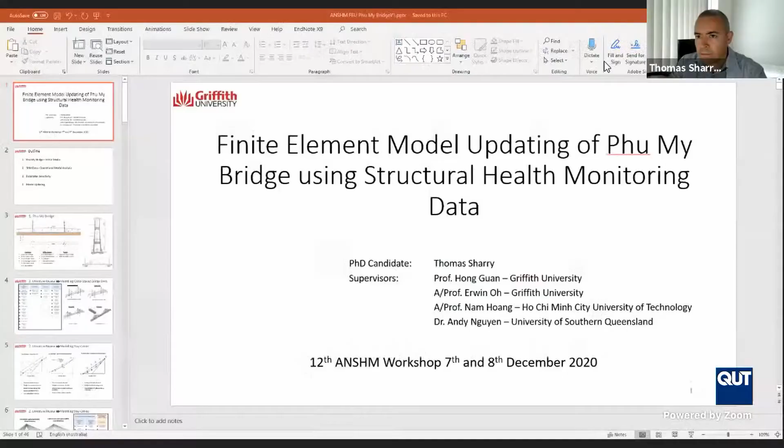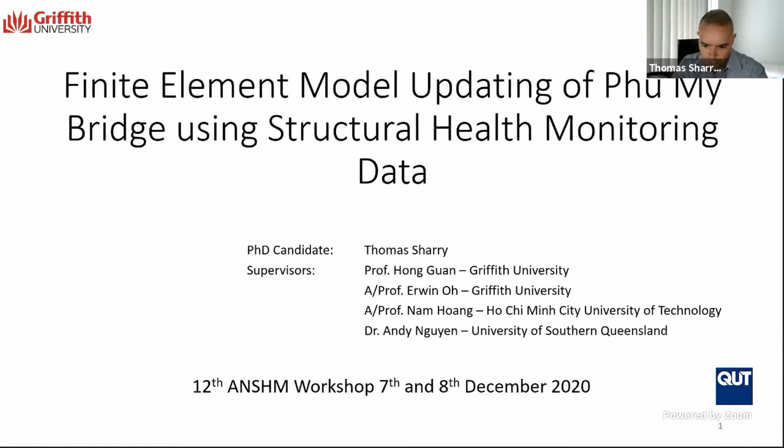Good morning everyone, or good afternoon, and thank you to Professor Guan and the organisers for this opportunity to present some of the work I've been doing as part of my PhD candidature at Griffith University. I'll acknowledge our research team: my supervisors Professor Guan and Associate Professor Erwin Oh from Griffith University, Associate Professor Nam Hoang from Ho Chi Minh City University of Technology, and Dr. Andy Nguyen from the University of Southern Queensland.

I'll be presenting the progress so far regarding the finite element modelling and model updating of the Phu My cable-stayed bridge in Vietnam: an overview of the bridge, details of how the initial model was developed with some initial results, then results from the ANSHM data through operational modal analysis, parameter sensitivity, and the model updating procedure that will be used.

The Phu My Bridge is a cable-stayed bridge in Vietnam over the Saigon River in Ho Chi Minh City, connecting District 7 on the southwestern side to District 2 on the northeastern side. It's a reinforced concrete bridge with a 380-metre main span. The bridge opened to traffic in September 2009, and the SHM system was installed towards the end of 2019. That system comprises 3 inclinometers on the eastern side pylon, 8 accelerometers (4 on the deck and 4 on the longest cables on the eastern side), 6 cameras, 1 weather station, and 1 anemometer.

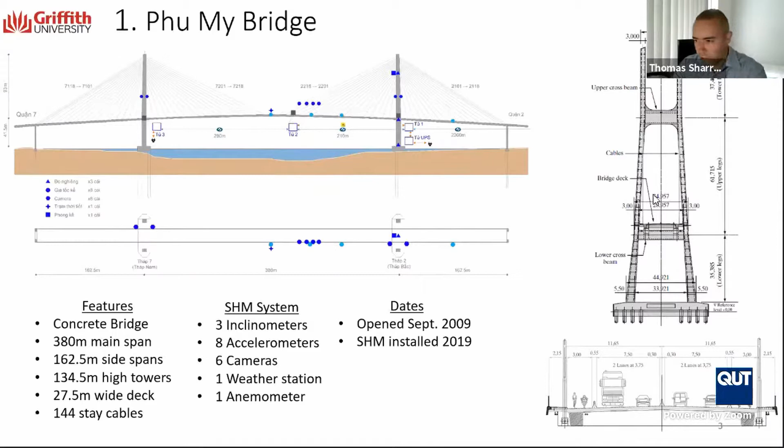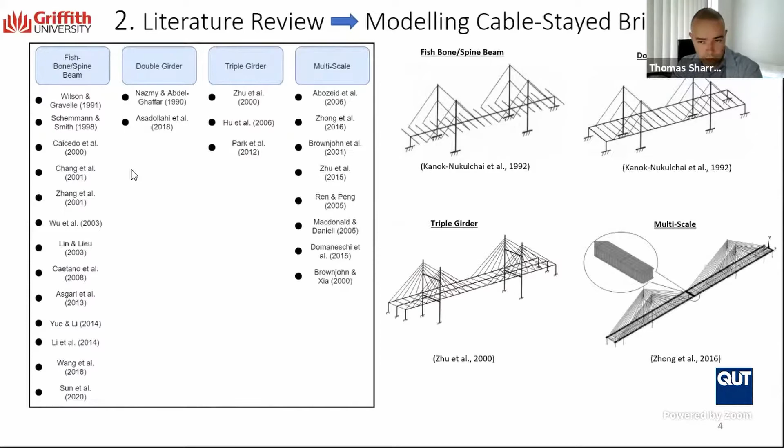The first step was to identify different cable-stayed bridge modelling approaches existing in the literature: a single girder model representing the deck as a line beam element, a double girder model, a triple girder model, and a multi-scale model using a combination of line and shell or solid elements. From the literature, by far the most common was the single girder model, also called the fishbone or spine beam model, mainly due to its simplicity in modelling and accuracy in identifying global properties.

For modelling the stay cables, there are 3 main approaches: the linear model, with a node at the deck level and a node at the pylon connected by a straight line element adopting the cable's modulus of elasticity, ignoring geometric effects; an improvement using an equivalent elastic modulus via the Ernst formula, which approximates the cable profile as a parabola; and a multi-element model with intermediate nodes connected by straight line elements, with weight distributed along these nodes to better approximate the cable's true catenary shape.

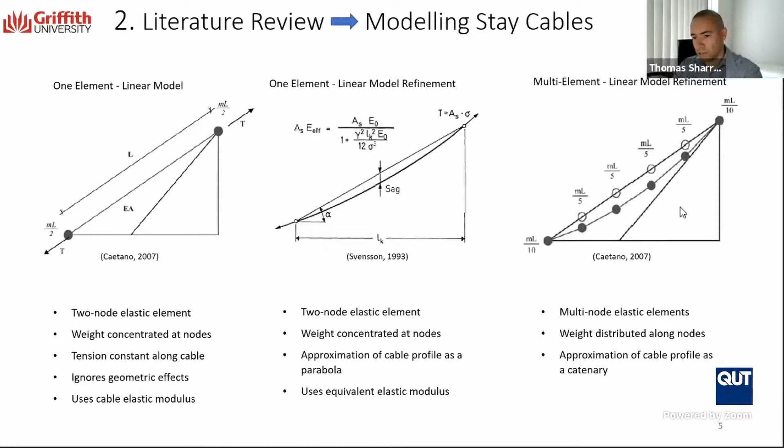An example shows the difference between a one-element cable system and a multi-element cable system: one-element cables result in global behaviour, such as behaviour in the deck and pylons, whereas multi-element cables result in local behaviour, such as individual cable vibrations. A glance at the literature shows the equivalent elastic modulus for the one-element cable system is by far the most popular, though there are also many studies with multi-element cables, mainly investigating the interaction between local and global vibrations.

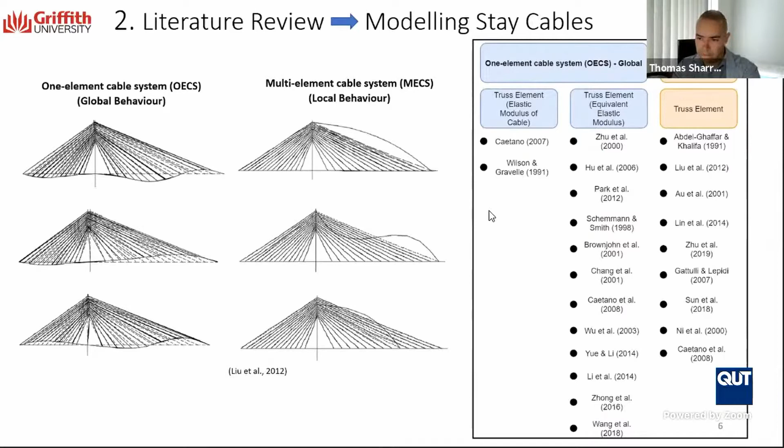The next step was to duplicate an existing model in the literature to identify a valid method for modelling the Phu My bridge. A paper by Li et al. 2014 models a cable-stayed bridge in China used for SHM benchmarking studies. That model is shown on the left, along with the identified natural frequencies for the first 6 vertical modes, using the single girder method and one-element cables. My attempt at duplicating that, using Abaqus, is shown on the right. It's fairly consistent in terms of mode shapes and natural frequencies, though one model was slightly stiffer, causing a small difference in frequencies. Overall it was a worthwhile exercise, both for practice and for identifying a valid approach for modelling Phu My.

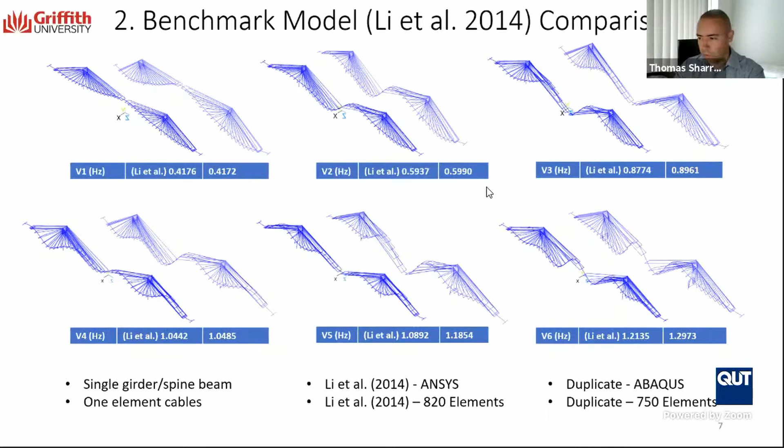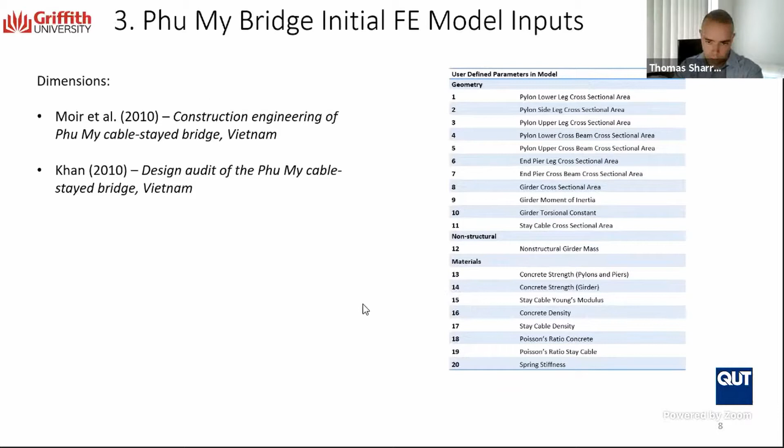So the bridge dimensions are available in 2 publications, and then from the model in Abaqus, 20 parameters needed to be defined related to the geometry of the bridge, the non-structural girder mass, and then material properties like concrete strength, density, etc. So all that needed to be defined, and from there the initial model of the Phu My bridge was created.

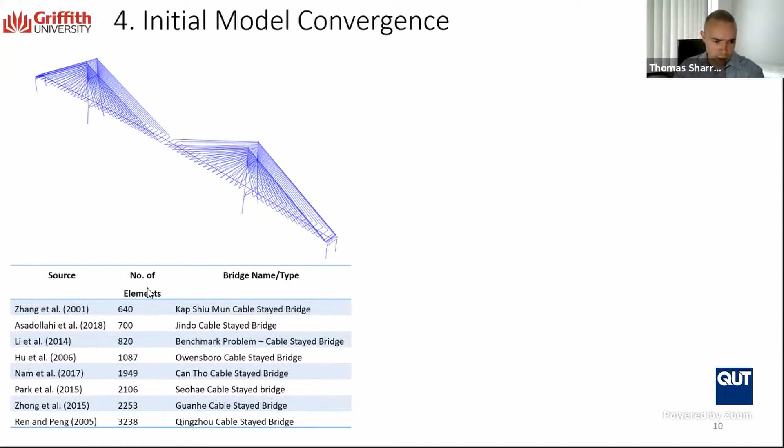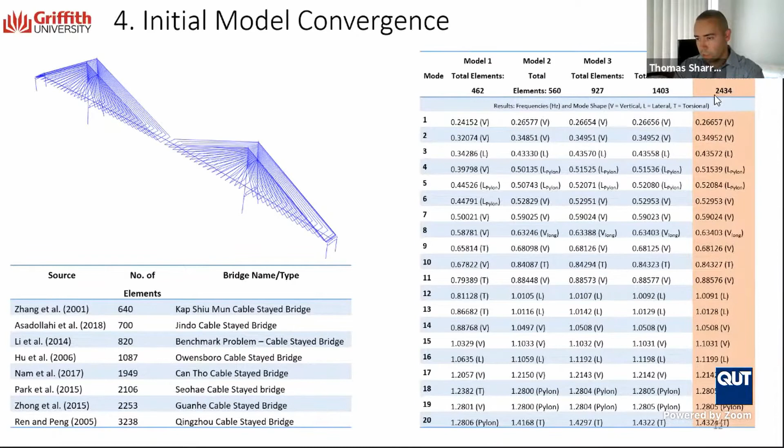Again, a comparison with the literature using similar sized bridges and their FE models. The number of elements range from roughly 600 upwards of 3,000. My initial first model had 462 elements. Those elements were slowly increased until convergence in results was achieved with the model with roughly 2,434 elements. Just an example there of how convergence was achieved in the results for mode 1 as the number of elements increased in the model.

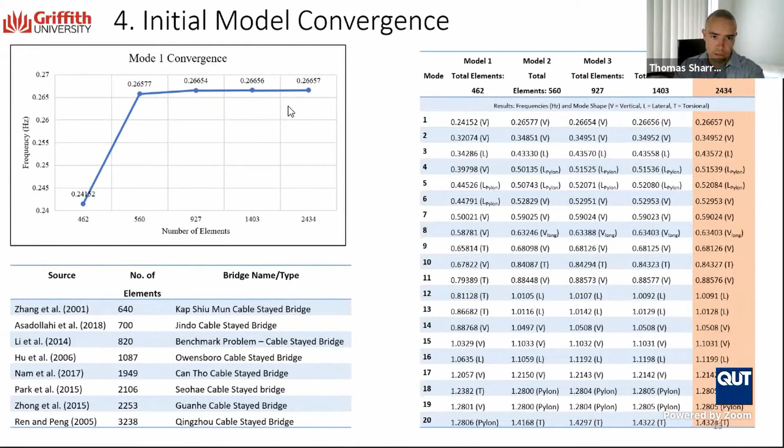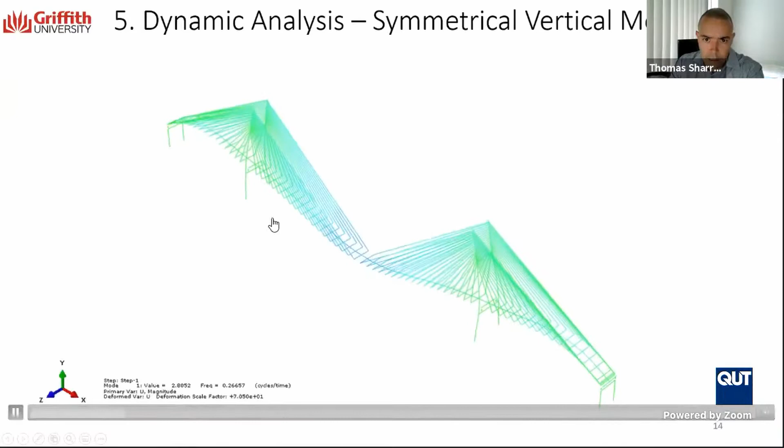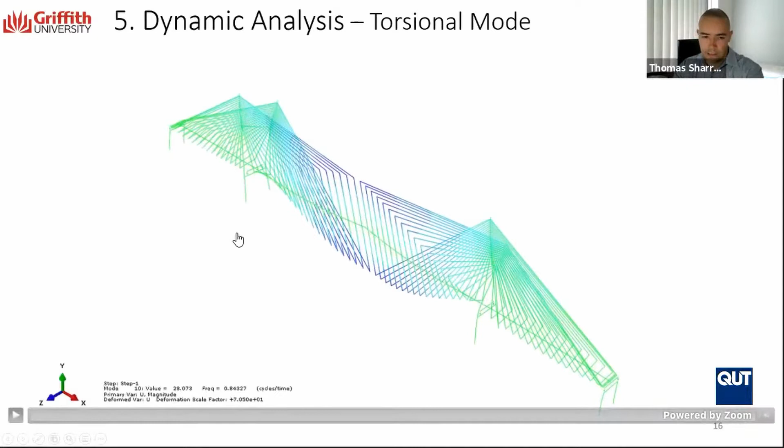Okay, so that was the initial model and its initial results. So moving on to the SHM data.

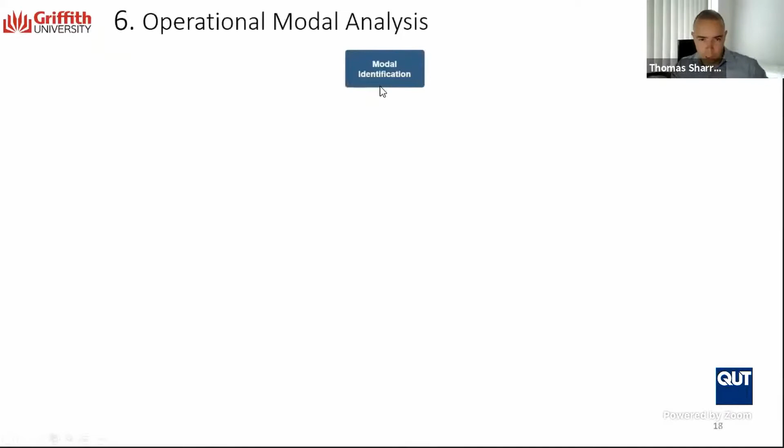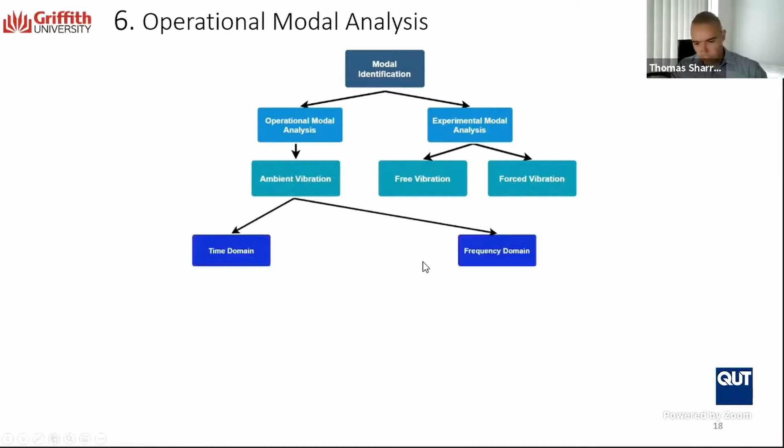Just a very brief overview, with modal identification as the goal here, can be achieved through operational modal analysis or experimental modal analysis with different vibration inputs. So obviously for long-term monitoring, we're interested in ambient vibration, which can be expressed in either the time domain or the frequency domain, examples of those. And then within each domain, a set of methods and sub-methods used to identify the modal properties from that data.

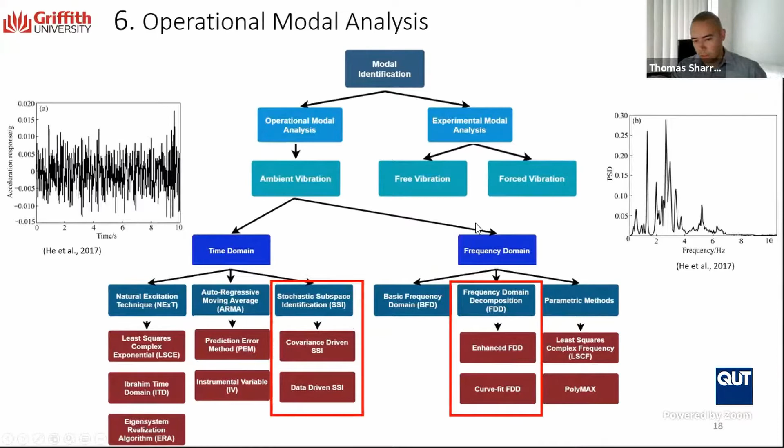So for my project, I'm using a program called Artemis Modal Pro, which allows users to select either the stochastic subspace identification method or the frequency domain decomposition method, depending on which domain they're working in. So this here is a 1 hour time series data, just an example from the Phu My bridge: the mid-span accelerometer in the X and Y direction, and the side-span accelerometer in the X and Y direction as well. The initial data looked at over a 1 week period, which was 168 1-hour sets of data that were analysed.

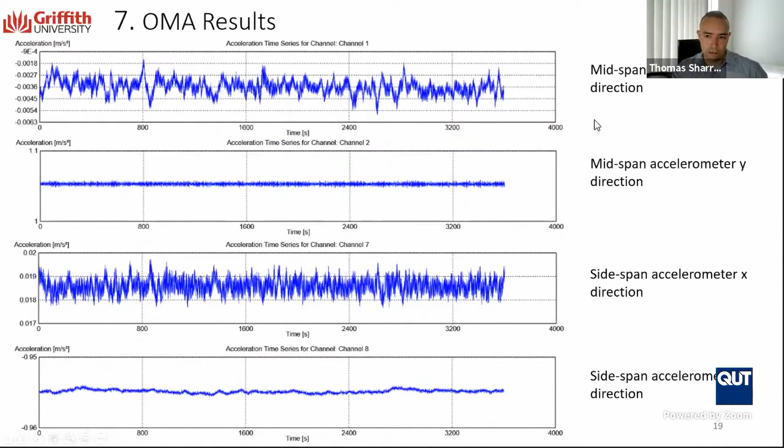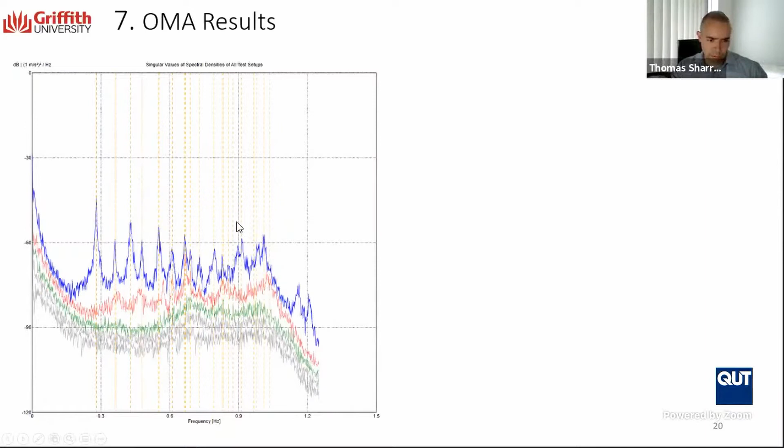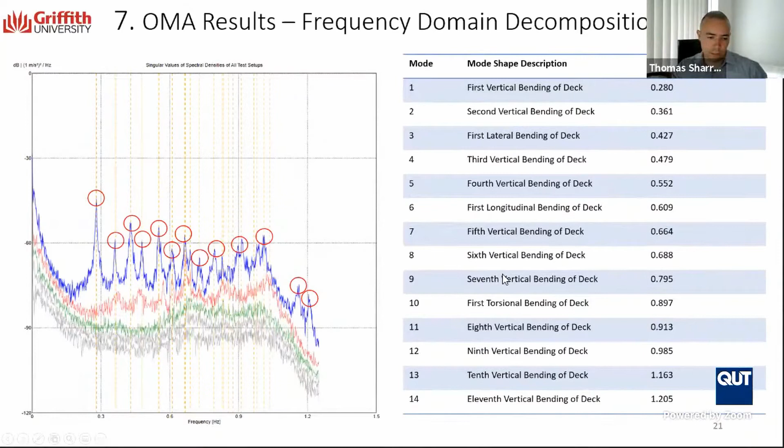Here's an example after converting to the frequency domain, so it's a lot more intuitive. You can see the prominent peaks there. So using the frequency domain decomposition, essentially a peak picking type method, the natural frequencies and the mode shapes were identified from the data of the bridge.

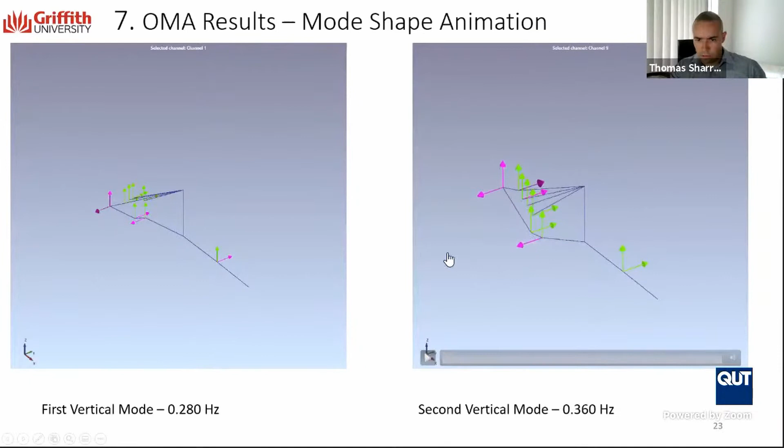So just some mode shape animations from Artemis. You can see the first vertical mode there. On the left-hand side is the mid-span of the bridge, and the right-hand side the side span. Each of these arrows is the location of an accelerometer in the X or Y direction. So the second, asymmetrical vertical mode, a lateral mode, and just an example of a higher lateral sway mode. That data was from the end of July and early August.

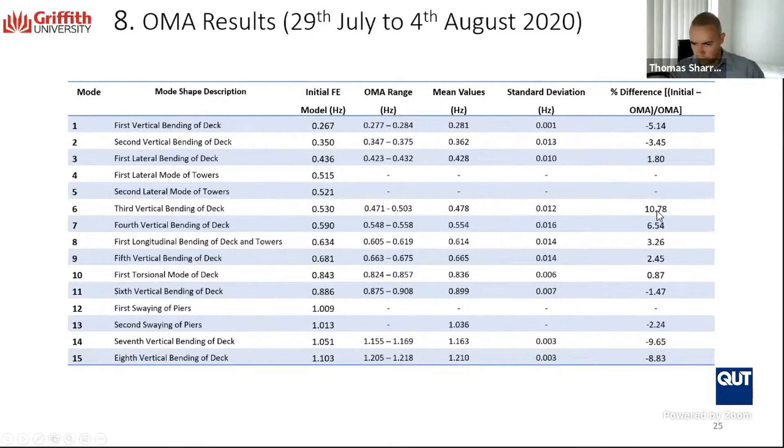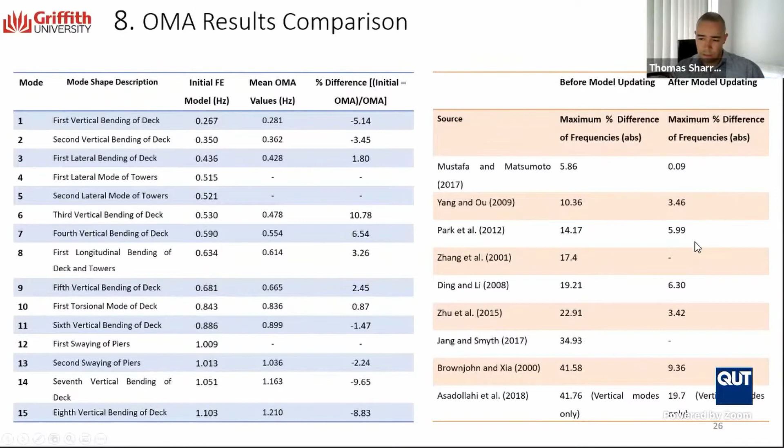So comparing that to what's in the literature, you can see before model updating, minimum or maximum absolute differences range from roughly 6% and 41%. So for my results, having a maximum value of 10% puts me down at the lower end of this range, which is a good start. And then after model updating, I'd expect a maximum difference of ideally less than 6 or 5%, which would be a good achievement.

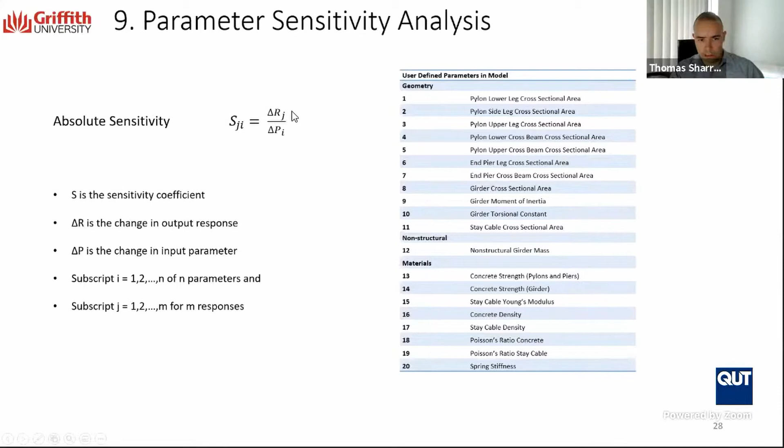So moving on to parameter sensitivity. The absolute sensitivity was calculated for each of the input parameters in Abaqus, simply by the change in response divided by the change in parameter value. It's just a very sort of bird's eye view of the different sensitivities. Cable cross-sectional area is by far the most sensitive, so I've had to separate it from the rest. You can see the next sensitive would be the girder cross-sectional area, and you can see how it changes sensitivity for each mode, 1 to 15.

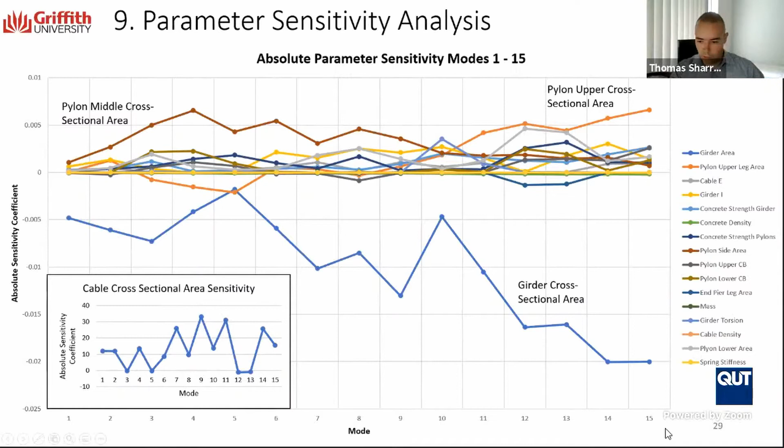So another way to look at that data is to break it up by mode, and we can see how sensitive individual parameters are for each mode. For the early modes, for example, the pylon side area is quite prominent. And then in the higher modes, the pylon upper leg area comes into play as well.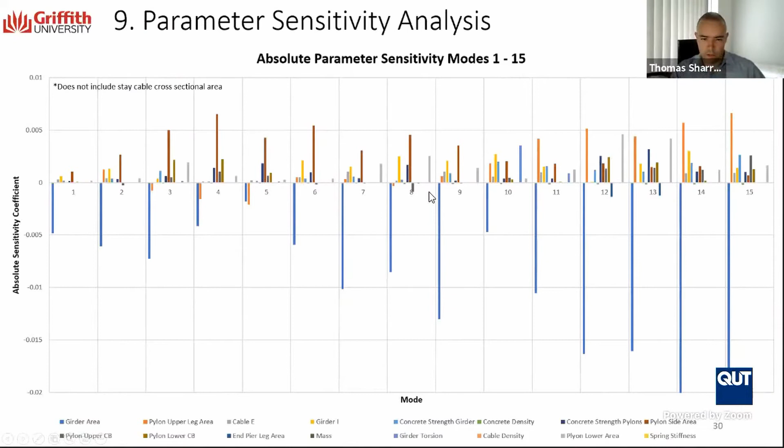So it just gives you a better feel for how the model responds to different changes in parameters. The parameters were then rearranged from most sensitive to least sensitive, stay cable cross-sectional area being the most sensitive, followed by the girder cross-sectional area and pylon dimensions. Things like Poisson's ratio and the end pier dimensions had very little or no sensitivity.

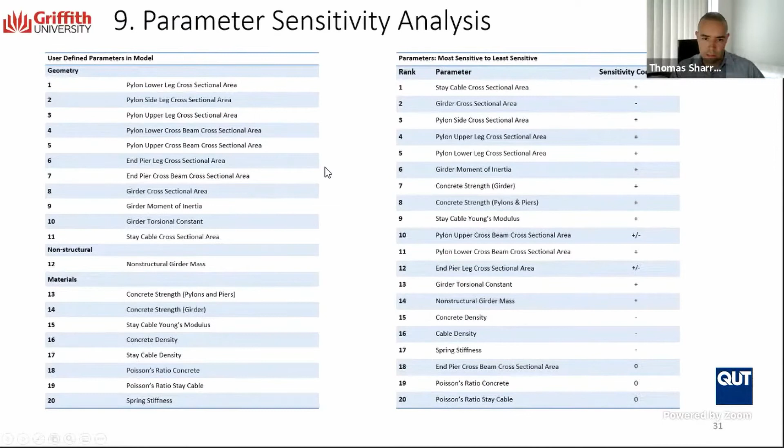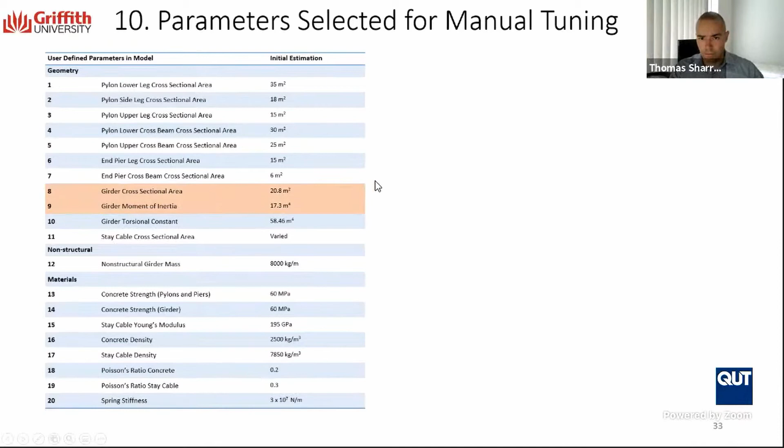Manual tuning was attempted just to see if that initial model could be improved. The two most uncertain parameters were the girder cross-sectional area and the moment of inertia, so those were slowly increased over a number of iterations.

The red here indicates a mode getting worse, whereas the green shows improvement. By the third iteration, there was small improvement across most of the modes, but you can see mode 1 and 2 are worsening.

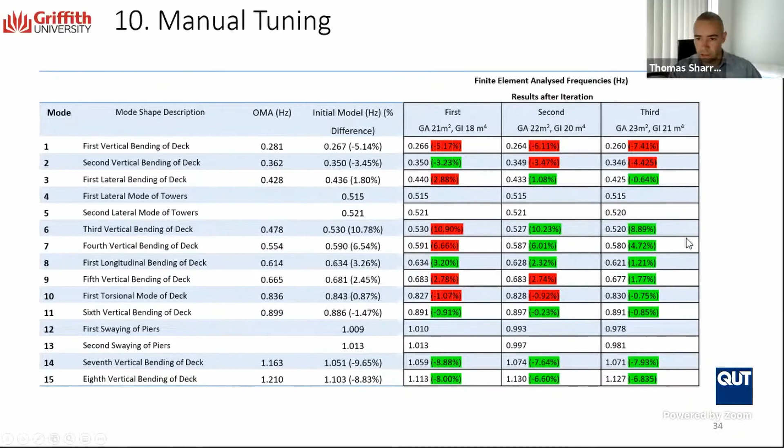This mode 6 here was quite problematic, because as you can see, any attempt to improve this mode actually makes mode 1 and 2 worse, and vice versa. Attempting to improve these makes the other modes worse as well. So a good candidate for an optimization type problem, especially when you're including other parameters through model updating.

So on model updating, a very brief overview of the different techniques or methods available. Direct methods involve updating the mass and stiffness matrices directly. Obvious disadvantages have limited its application to fairly simple structures, like boxes and beams.

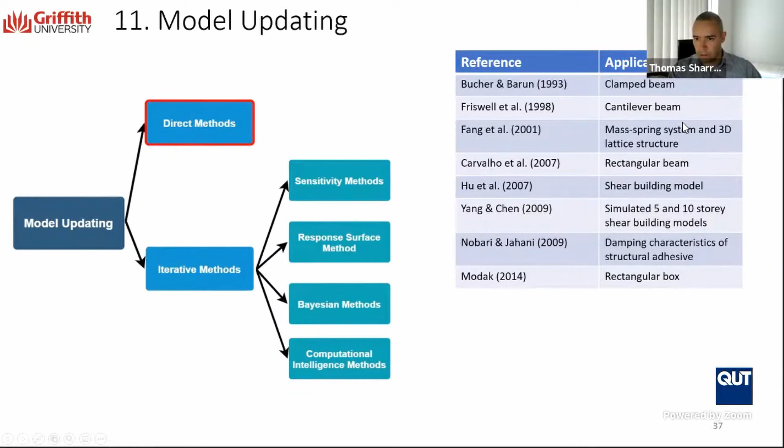Sensitivity methods are by far the most popular, iteratively changing the most sensitive parameters, with plenty of applications to cable-supported bridges.

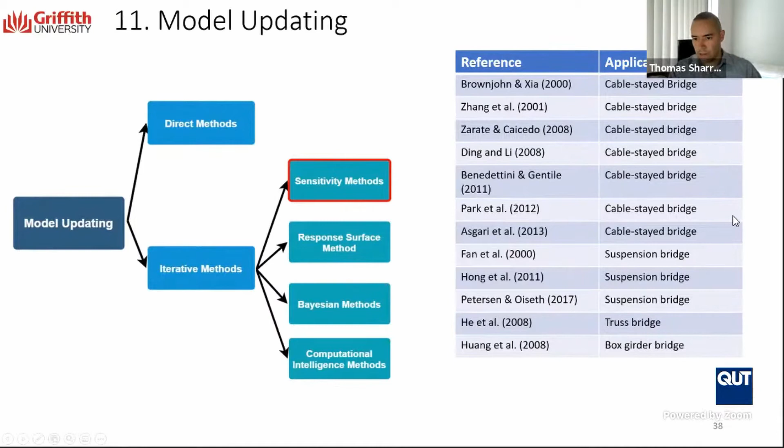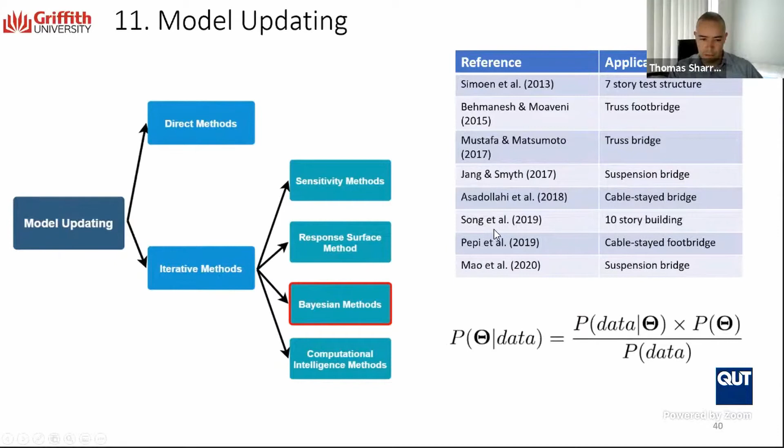The response surface method uses a surrogate model in lieu of the original FE model. Bayesian methods consider probability distributions of data to better account for uncertainties and variability using Bayes' theorem, and then computational intelligence methods use high-level optimization methods to solve the updating problem.

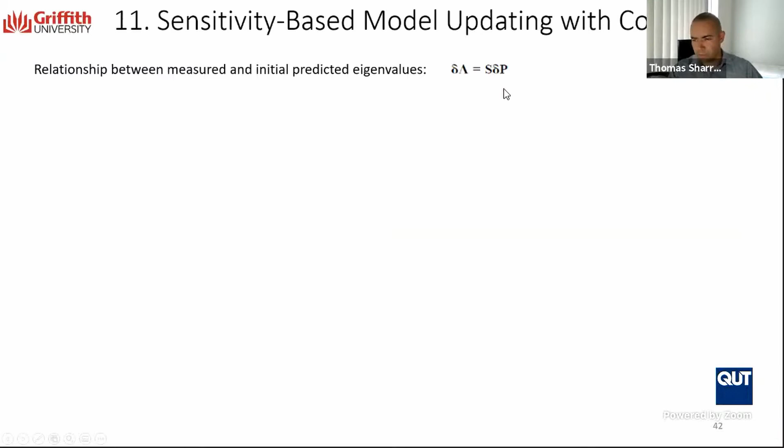So for my project, I proposed to use a sensitivity-based model updating with constraints, so the relationship can be posed as an inverse problem. I'll run through this very quickly because I'm running out of time.

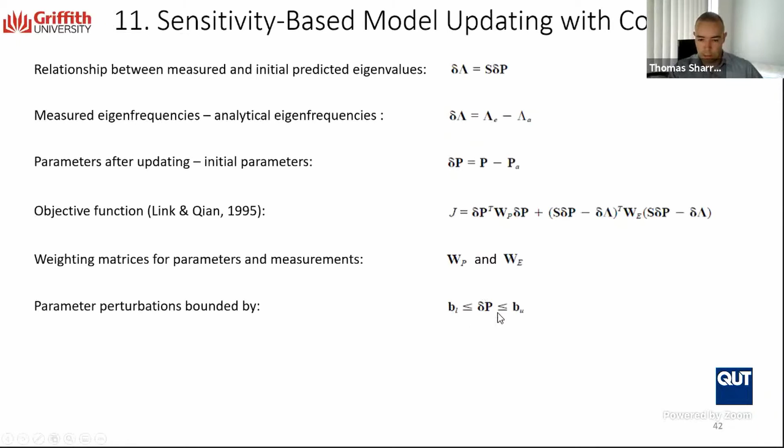Using this objective function, it introduces a couple of weighting matrices which take into account the uncertainties of the measurements and the parameters. Constraints make sure that the changes are physically sensible, so constraints are placed on the change in parameters.

That can be expressed as what's called a quadratic programming problem, comprised of either vectors or matrices with some of the terms we're familiar with: changes in the parameter, changes in the natural frequencies, etc., and the sensitivity matrix.

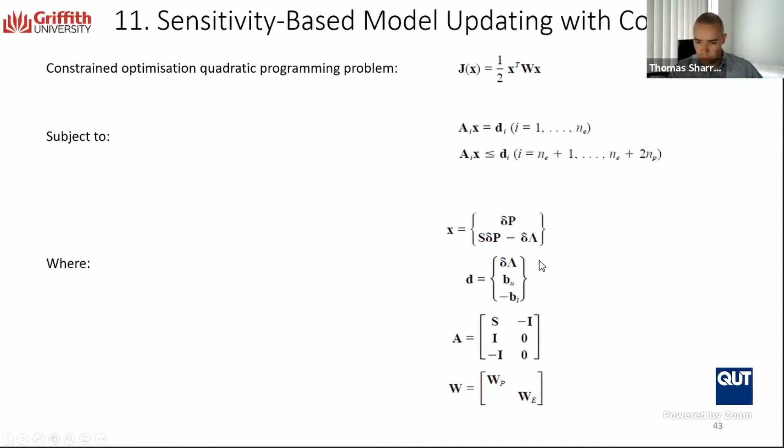A very brief overview: defining inputs, initial parameters into the model, initial frequencies, comparing it to the OMA data. If there's a difference, computing the sensitivity, defining the constraints, solving the optimization problem to determine delta P, the change in parameters, which are then added onto the initial parameters, and a new iteration starts again. So that's currently what I'm working on, a MATLAB script to automate as much of this as possible.

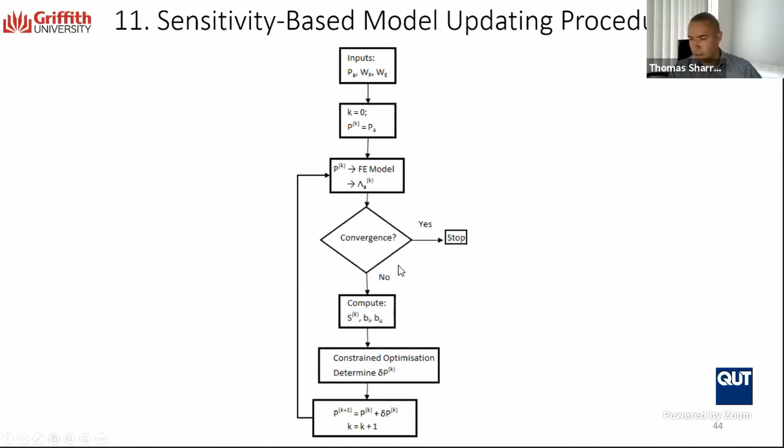For continuing research, I'll also be considering different modeling approaches and how they affect identifying the initial results. Considering uncertainties is a big one as well, so data during different periods or different times of the year, and then eventually using an updated model to evaluate a critical component of the bridge.

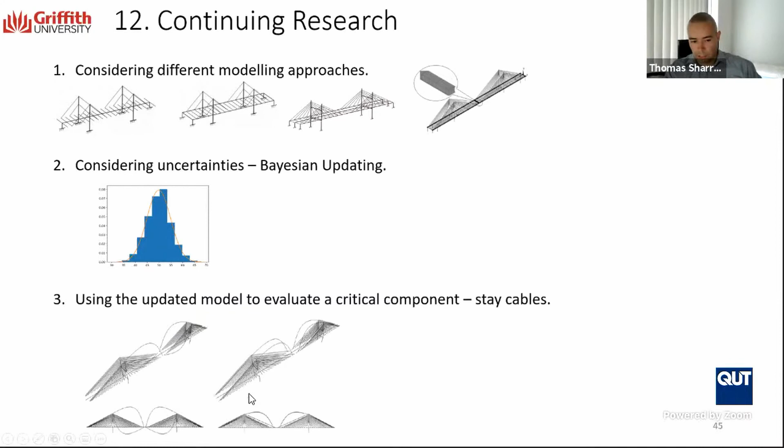Using a multi-element cable system, if we're able to identify frequencies of the cables, how accurate is that, and ultimately how useful is that in identifying or monitoring cable tension.